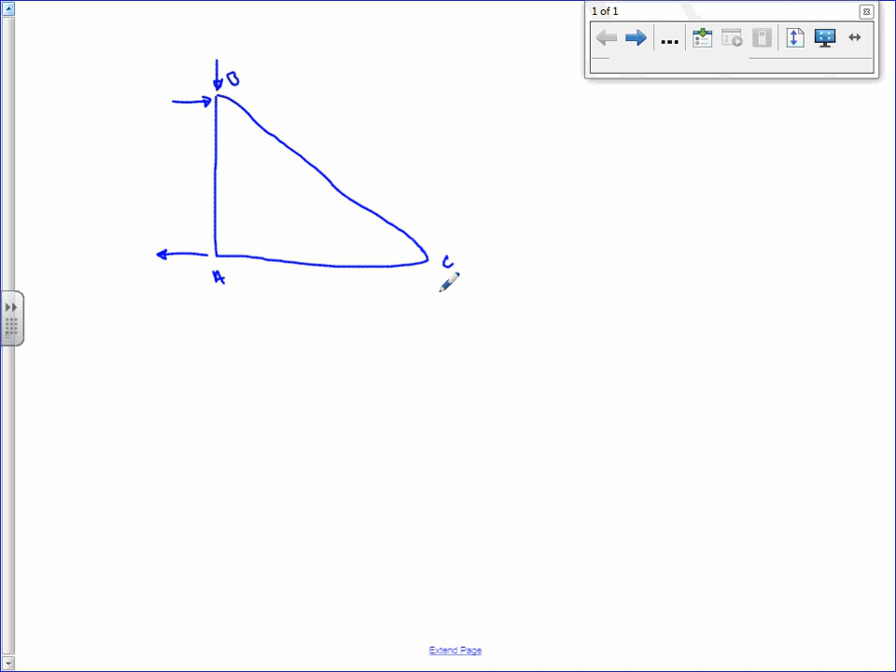And I'm going to label these joints. Here we have joint A, here we have joint B, and here we have joint C. And at C, we have a 50-pound weight. And then I'm going to change this 50-pound weight for your 6 weeks test on this. This is going to be the truss for your 6 weeks test, and I'll change that weight. We also know that this is 3 feet, and this is 3 feet.

Okay. So once we have our truss free body diagrammed, then we try to figure out the direction of the reaction forces. So you imagine if you were holding this object and what direction the forces would have to be applied in order to keep this still. So here at the pin joint, it has to hold it up. So this reaction force needs to change direction. So I'm going to put this reaction force as up.

And at the pin, it's attached to the wall. So in order to be attached to the wall, this reaction force needs to be the other direction. Okay, and if this reaction force were in this direction, then the whole bottom part of this truss would kind of swing to the left. So we don't want it to swing to the left. It needs to be stabilized. So at the wall here, the reaction force is going to push in the other direction. And you just kind of have to reason your way through these reaction forces.

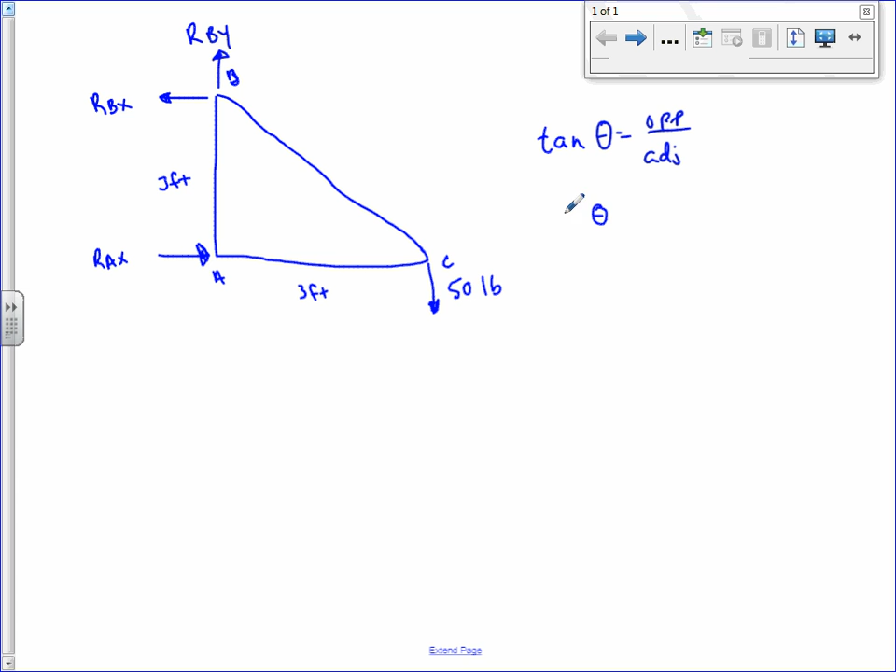So the angle is going to be equal to the inverse tangent, and then plug in the values 3 feet over 3 feet. And then we solve for the angle, and we see that the angle is going to be equal to 45 degrees. And of course, the angle we were talking about was here at C. So this is a 45-degree angle. And it would be the same over here. But you could just reason yourself into seeing these as two 45-degree angles. All right. The next thing we do is solve for the reaction forces. So I'm going to label reaction forces.

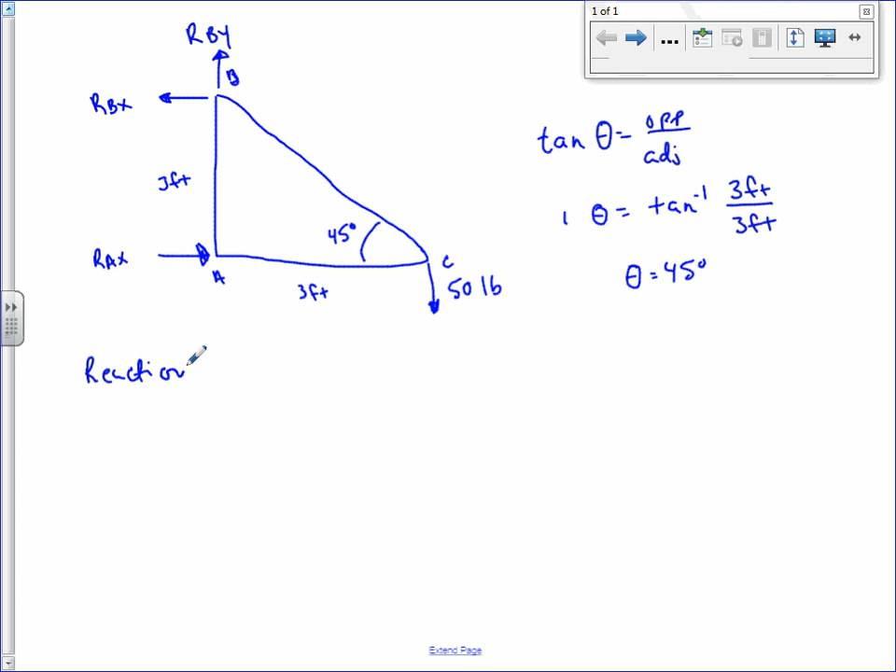And in order to solve for the reaction forces, what do we do? Put the sums of the forces... Yes. We have the sum of the forces in the x direction. We make that equal to 0. The sum of the forces in the y direction. We make that equal to 0. And then the sum of the moments on this truss. We make that equal to 0. So here are our equations that help us solve everything on a truss.

So in the x direction, we have the reaction force at A in the x direction, which is in a positive direction. So we're going to call it the reaction force at A in the x direction. The reaction force at B is in the x direction, but it's a negative force, so I'm going to subtract it, and I'm going to call it the reaction force at B in the x direction.

I'm going to make those equal to 0, and when I do, I see that the reaction force at A in the x direction is going to be equal to the reaction force at B in the x direction. So if I can find one of them, I found the other. And I'm going to leave it there, because that's as far as I can get with our known values until I know more.

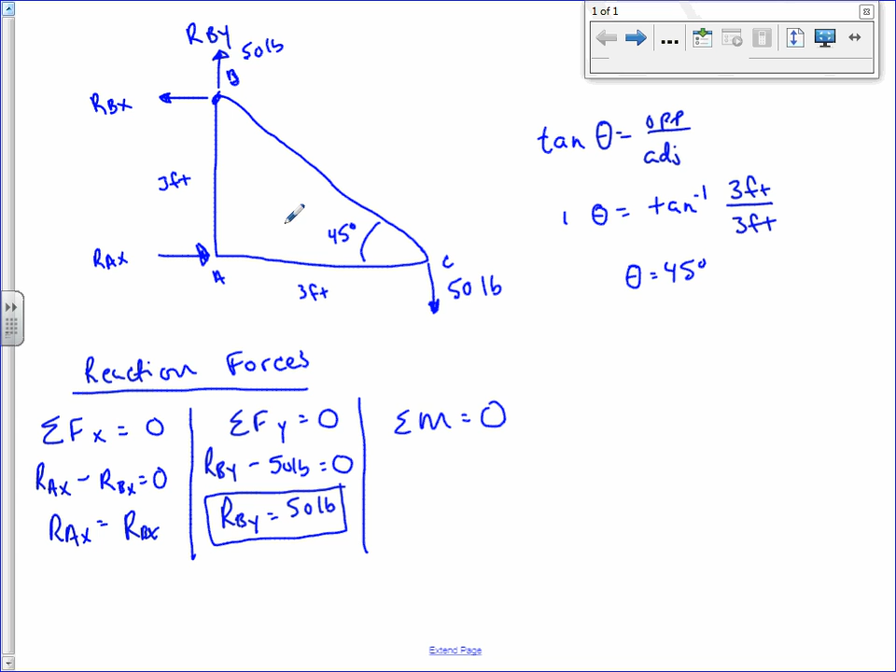Okay, so the sum of the moments, let's see, what are my moments? I have a moment at A, okay, so this reaction force could cause rotation in this direction. What do we call this direction? Counterclockwise. So is that going to be a positive or a negative moment? Positive. Okay, so we have the moment at A, and it's positive.

What's our other moment? Let's see. At C. Okay, so at C, we could have rotation in this direction. Is that going to be positive or negative rotation? It's clockwise, right? That's the way the hands on the clock turn. So it's negative. So we have a moment at C, and we're going to set those equal to 0. So once we find the moment at A, it's going to be equal to the moment at C.

And let's now, at this point, break the moments down into what comprises a moment, which is what? Force and distance. So the force at A is going to be the reaction force at A in the x direction times the distance at A, and that's going to be equal to the force at C, which is a known value, 50 pounds, times the distance to C.

And remember, that distance has to be a distance that's perpendicular to the force. So here's our force, and here's our perpendicular distance. So we have to recall the L-shaped wrench scenario here. This is the distance we're talking about, 3 feet. Okay, now we're going to solve for our unknown value. And what is our unknown value in this equation?

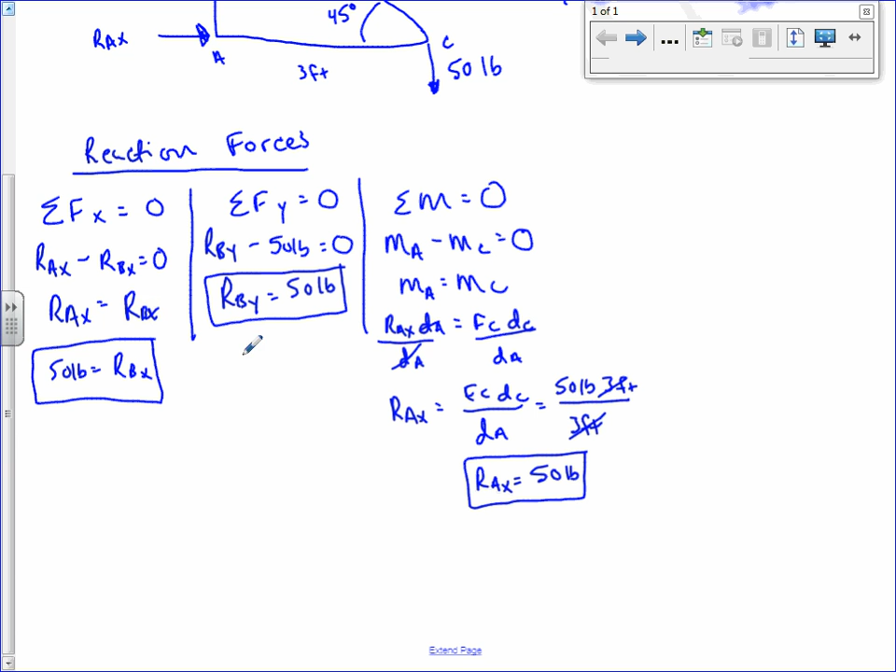Okay, on your 6 weeks test tomorrow, am I going to have to show all this work? Yes, you have to show all this work.

Okay, so now I'm updating my truss diagram. I found my reaction forces. So now we're going to go to this truss diagram and we're going to make some changes here. We're going to isolate the joints. So I'm taking out the beams, and we're going to assume these beams are in tension, which we show like this. Until we have a sign change in our calculations, we're going to assume everything's in tension.

Okay, and let's label these beams. So we have AB, BC, and AC. So the last thing we're going to do here is find the values of the forces that are acting on each one of these beams. And we only have 3 joints, so this one's easy.

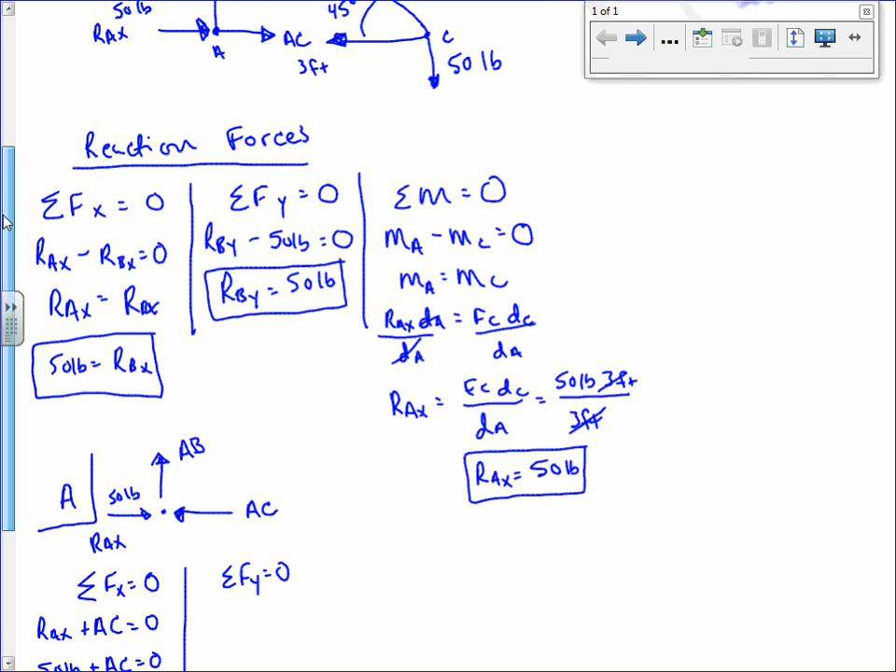So that tells us that AC is a 50-pound force, but it's actually in compression. So now we got to go back here and we've got to redo our diagram, and we've got to change AC to be in compression, so it's going to point towards the joint. And then let's also go back up to our main diagram here, and let's change the direction of AC.

And let's call AC a 50-pound force in compression. In the Y direction, sum of the forces in the Y direction are equal to 0. I already wrote that down. Okay, in the Y direction, we have no forces in the Y direction on this joint. We have a member, AB, but there are no forces acting in the Y direction. Everything is completely in the X. So we're going to therefore say that the force on AB is equal to 0.

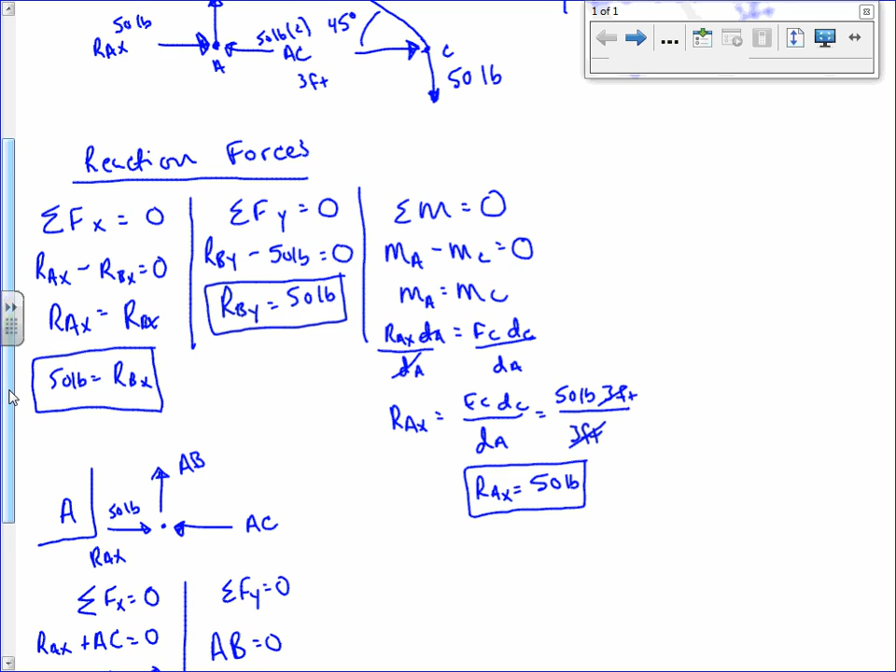And so if you were working on that and building that, you could make AB a very light member. It doesn't have to be structurally strong or expensive. Okay, so let's call AB 0 pounds. And it's neither in compression or tension because it's not experiencing any forces. Okay, so all we need to find now is BC. And we can just go to C now, to joint C, to find BC. And once we've found BC, we're done. We don't have to do anything else.

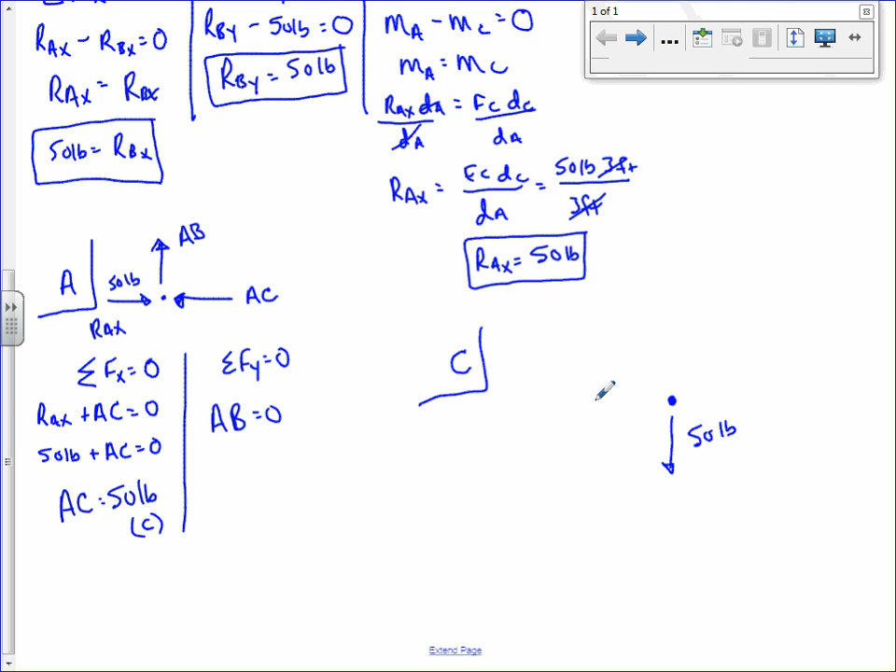So we're going to draw joint C. At C, we have a 50-pound force. We found AC to be in compression, so it's going to point toward the joint at C. And we found AC to be 50 pounds. And then BC is our unknown. We assume it's in tension, so we point it away. See, this is AC. Okay, what do I do now? Break it down into the X and Y components. So what am I breaking down? It's going to be BC because it's at an angle.

So BC has a Y component, which we're going to call BC in the Y direction, and BC has an X component. Which way do I point the BC X component? Yeah, to the left, because BC, the sense of the BC line is up and to the left. So when I draw in my component, I'm going to point it in this direction, which means it's going to have a negative value. Okay, this is BC in the X direction. Okay, so now I do my sum of the forces equation. Sum of the forces in the X direction are equal to 0. Sum of the forces in the Y direction are equal to 0.

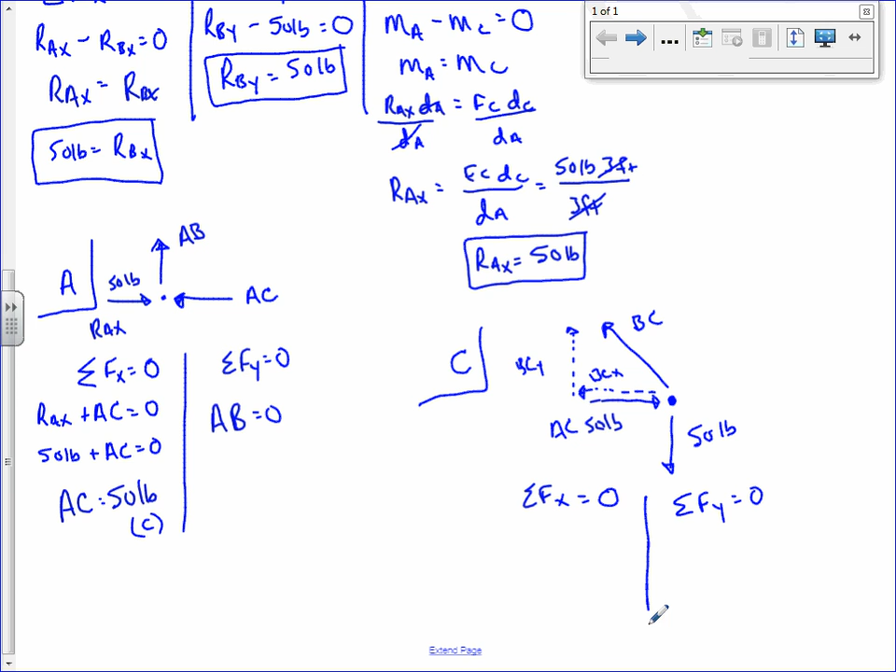Let's work on that X direction. What do I have in the X direction? I have BC in the X direction. What else? Yes, AC, which is 50 pounds. Okay, so I have a positive value for AC. Do you see that? Why AC is positive? AC is pointing to the right. So we're going to give it a positive value. BCX is pointing to the left. So we're going to give it a negative value. Negative BC in the X direction. And that's going to be equal to 0.

Plug in my value for AC, so that's 50 pounds, minus BC in the X direction, and BC in the X direction is going to be equal to 50 pounds. Okay, but I don't care about what BC in the X direction is. I need to find BC, but now that I know the value of the adjacent side of BC, I can use my cosine function and my known value for the angle to find out the value of BC. So that's what I'm going to do.

The cosine function, the cosine of the angle, is equal to the adjacent side over the hypotenuse. Okay, look at this diagram and make sure you can figure that out. This is what I want. This is the hypotenuse. This is the adjacent side. So the only unknown value I have in my cosine equation is the hypotenuse. Okay, so now I plug in values. The cosine of 45 is equal to 50 pounds, that's BC in the X direction, over BC. I now solve for BC, and I should find that BC is equal to 70.7 pounds. There was no sign change, so we keep it in tension and update the diagram.

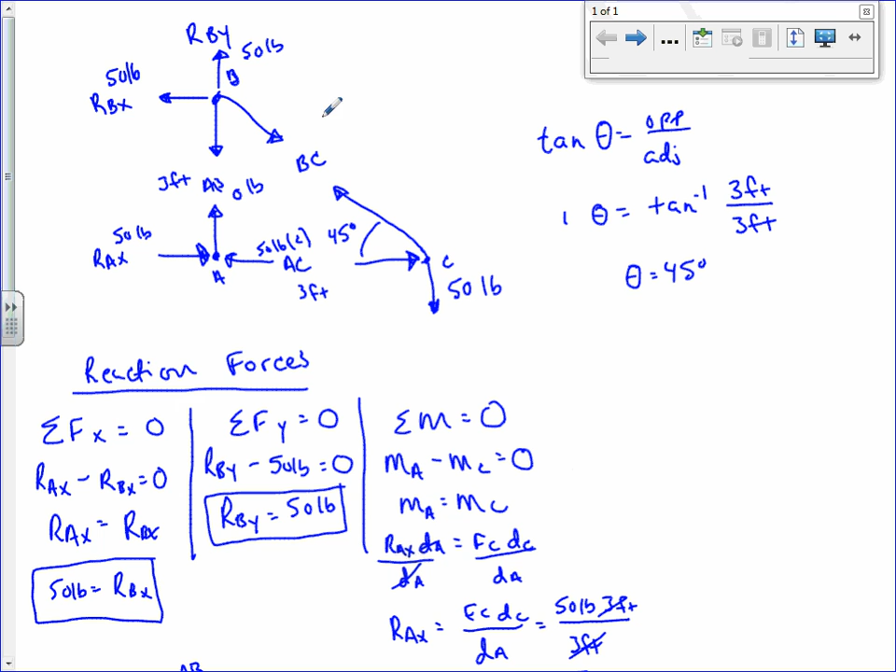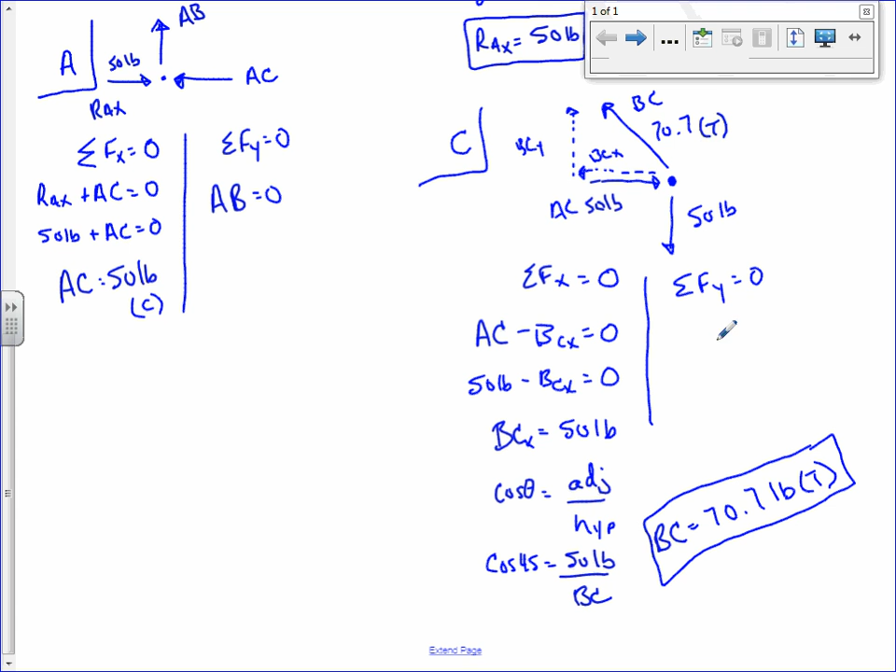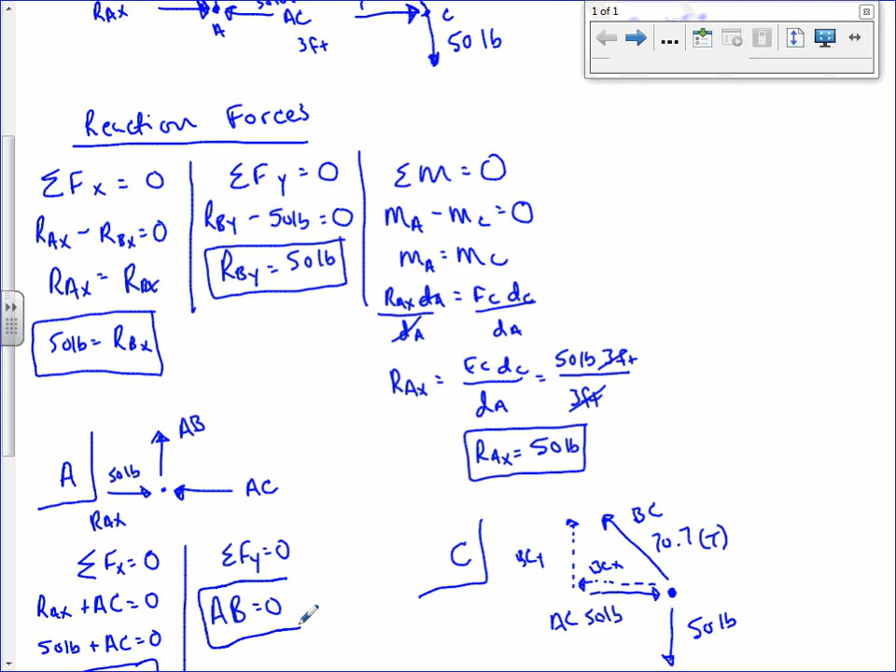Okay. Now, for my sum of the forces in the Y direction, I already found everything I need to know, so I don't have to keep going. This truss is solved. And please do put little boxes around your member values when you find them so that I can find them easily on your paper. Any questions? Okay.